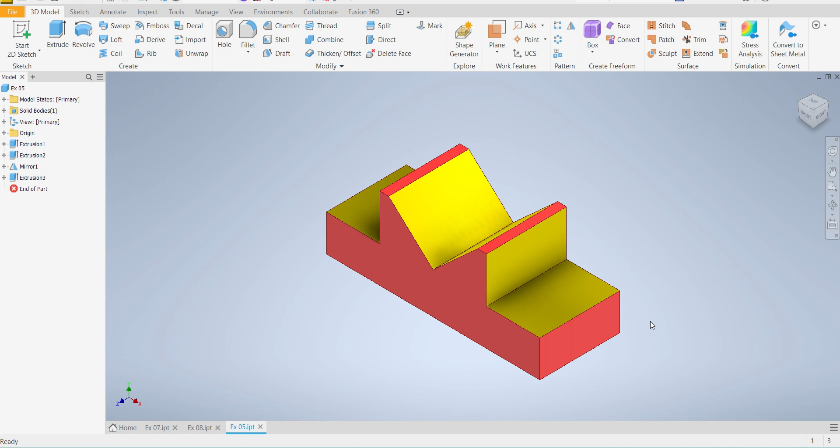In this tutorial, I am going to show you how to prepare this 3D model into 2D drawings. Select File, select New, select the template, drawing template, Create. So here click right mouse button, select Base View.

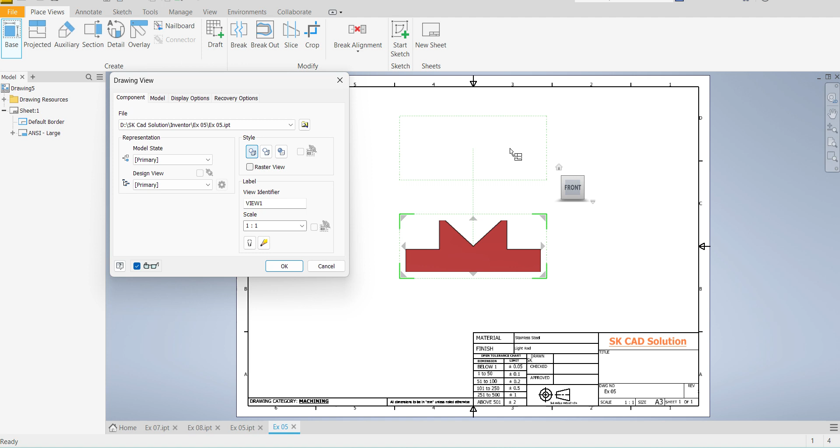This is the front view. I need one more view, top view, ISO view. Okay. So otherwise here also base view is there, you can click directly here. I will change the scale.

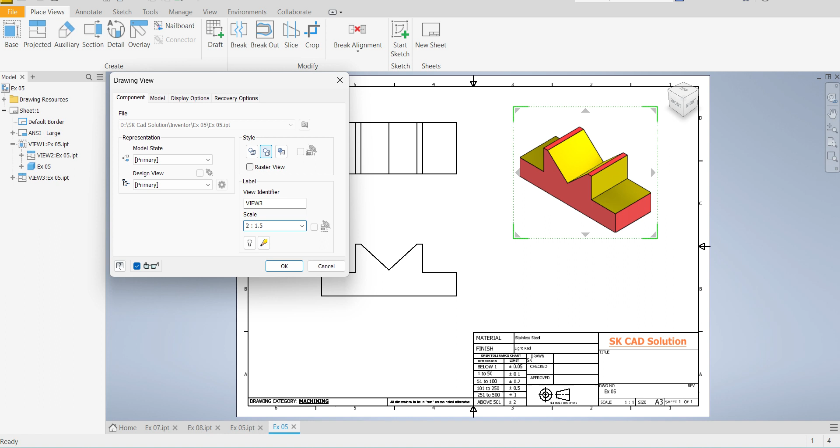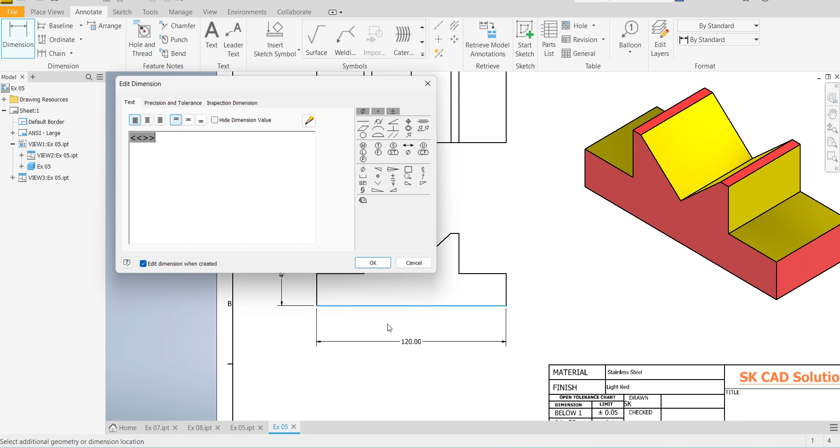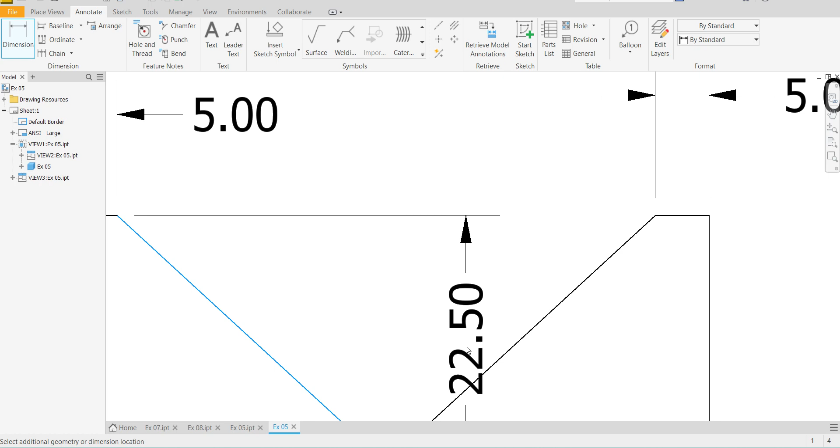Next give the dimensions, select annotate, select dimension, start with base dimension 120 and overall height is 45 mm. And this is 5 mm. This is also 5 mm. And this degree is 96 degrees. This height is 20 mm.

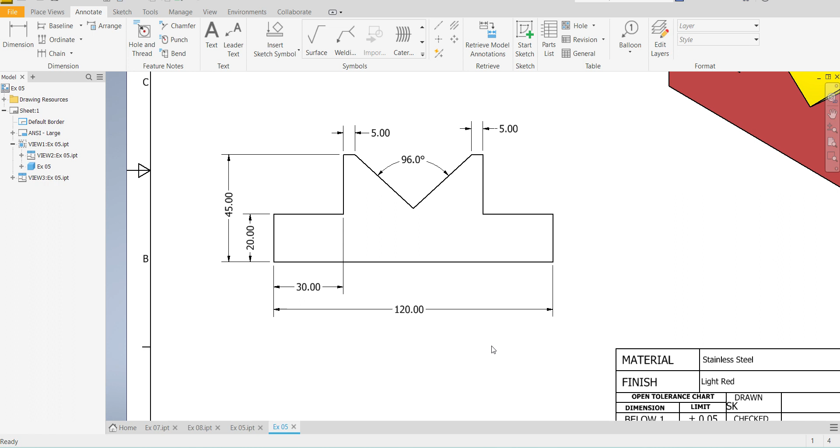In this tutorial I will show you how to give the symmetric tolerance. So just double click this dimension. Here you can see precision and tolerance. Click that. Here select symmetric. We need 50 micron plus or minus. Okay.

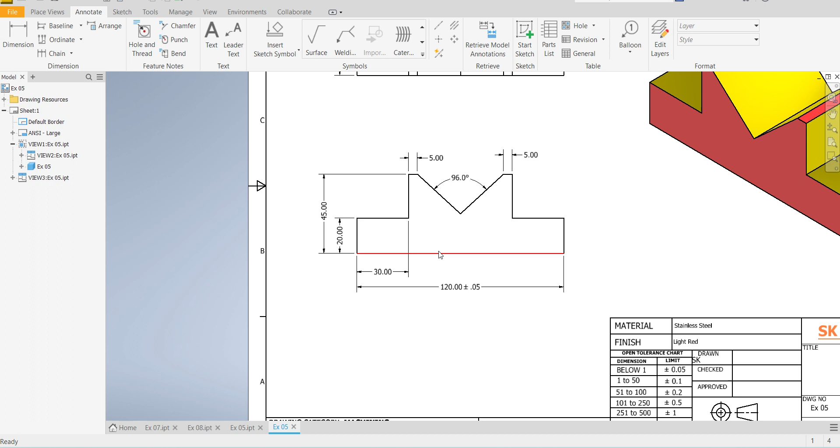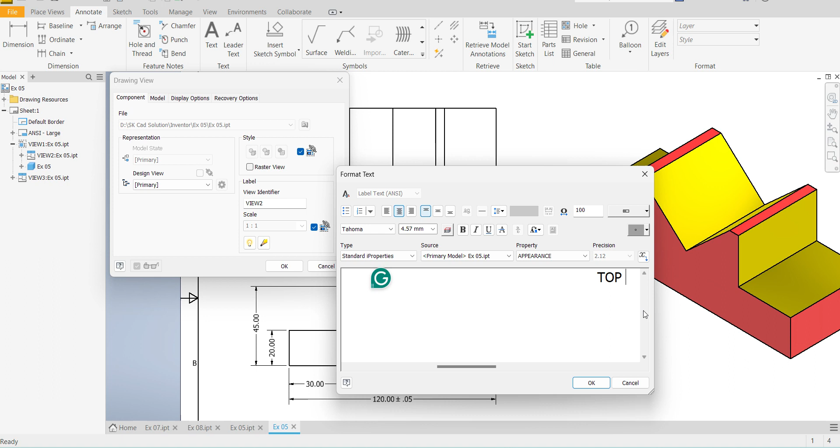So width of the job is 45 mm. Give the view names, front view, okay. So that's it friends.

First they will cut the raw material as per the base dimensions 120 by 45 and 45 mm, and also they will keep 5 or 10 mm extra for machining. After that they will do these two sides cutouts, then they will do V groove.

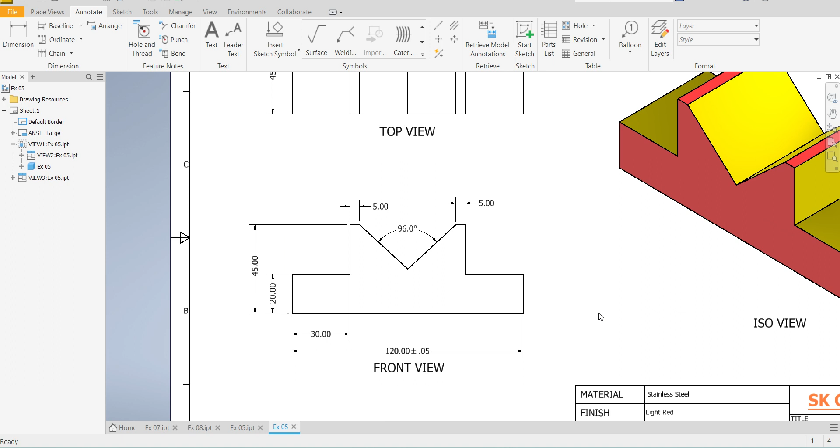So here also we need to provide center lines. So click this and this. So there is a center line.

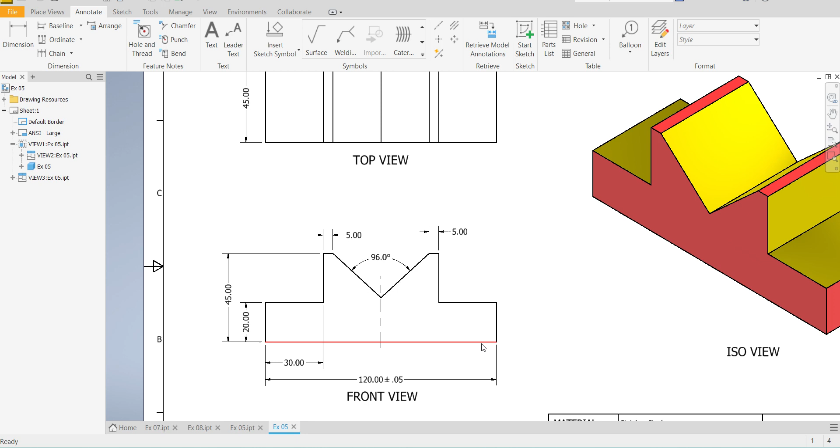I hope you like this video friends. In the upcoming videos I will show you how to give the tolerances and GD&T symbols.